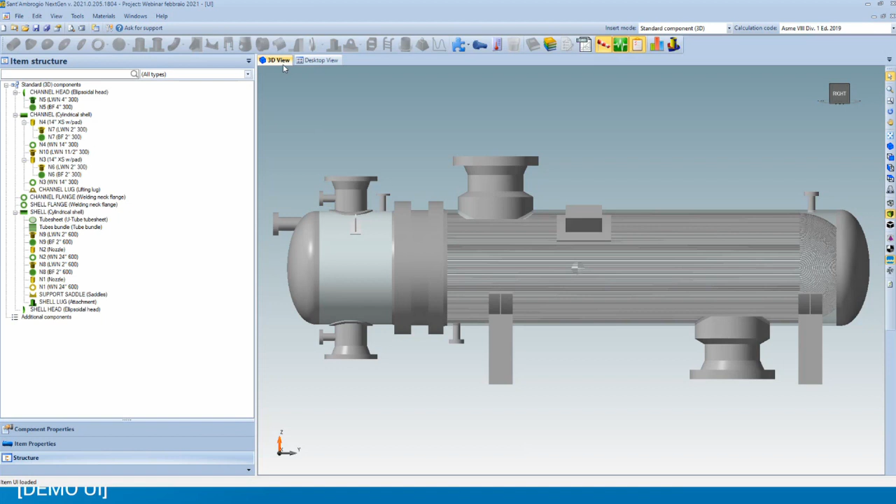I'd like to run the demo directly so I can show you what I'm talking about. This is a complete item - a heat exchanger, ASME Division 1. If I switch to the desktop view now, I have a more complete view of my components. The components I have in the 3D view I can see as icons, but we also added some columns.

These columns help you identify where you have issues, like if you have the wrong under tolerance or wrong corrosion considered, or if you want to check the joint efficiency. For instance, if you have a 0.85 joint efficiency in your components, you'd want to check if the joint efficiency for heads is set to 1, because it's one thing that can easily be forgotten.

Also, this list can be printed by clicking this button, and you can print it on paper and use it as a checklist to make a global check of your project.

If you have any suggestion for columns that we can add in this view, please share. The columns can be configured by selecting columns.

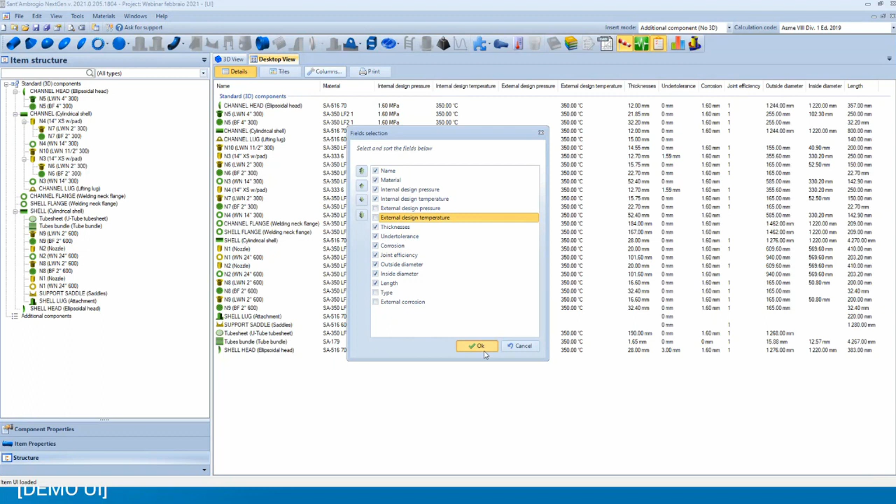Also, for example, if I don't have the external pressure, I can omit these columns, and this also affects the print of the same table.

So I think that this is a good way to use the desktop view, which is usually used to design components that are unbundled from the 3D view. But in this case, it's a helpful overview of your project. It can also be used to check if the materials are congruent.

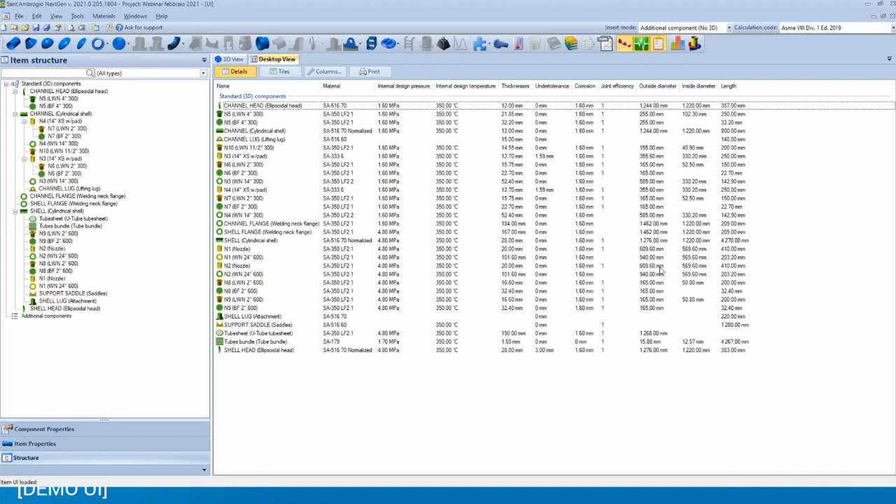And again, I was talking about the under tolerance, the new thickness under tolerance system. Previously, we were asking you to input an under tolerance in millimeters. That's the same thing that I have here in a cylindrical shell, so I was able to input the under tolerance, say 1 millimeter.

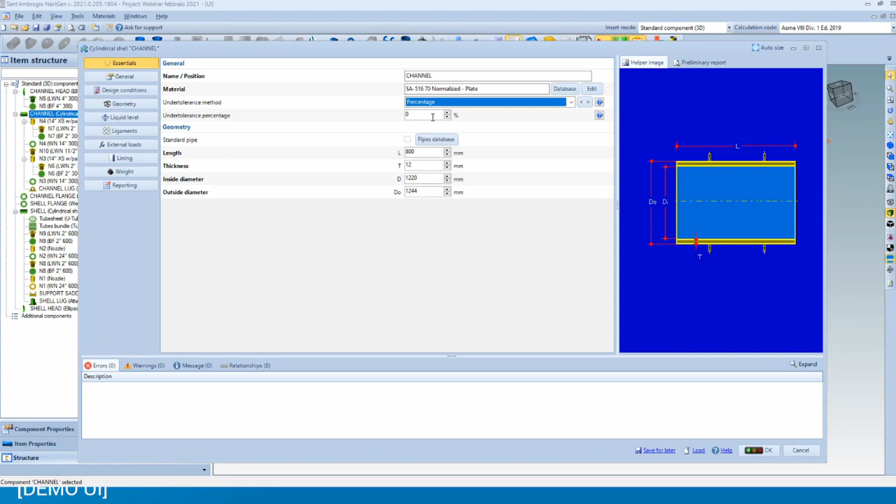Now we also have this list here that can be changed to select the under tolerance method. For example, if you want to input the percentage of under tolerance instead of the absolute value, you can do it. This is automatically set for nozzles.

For instance, I'm adding a nozzle now. I select a pipe from the database, let's say 2 inches. And you see here that the under tolerance method switched to percentage, and the under tolerance percentage is set here.

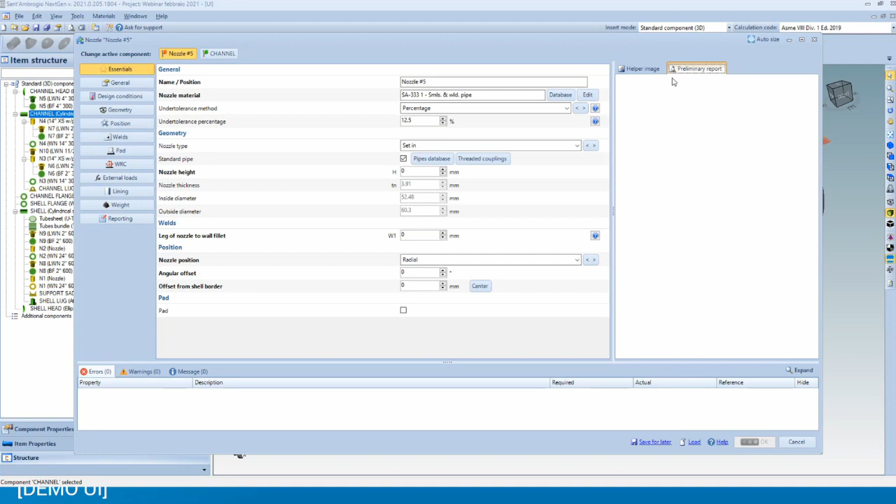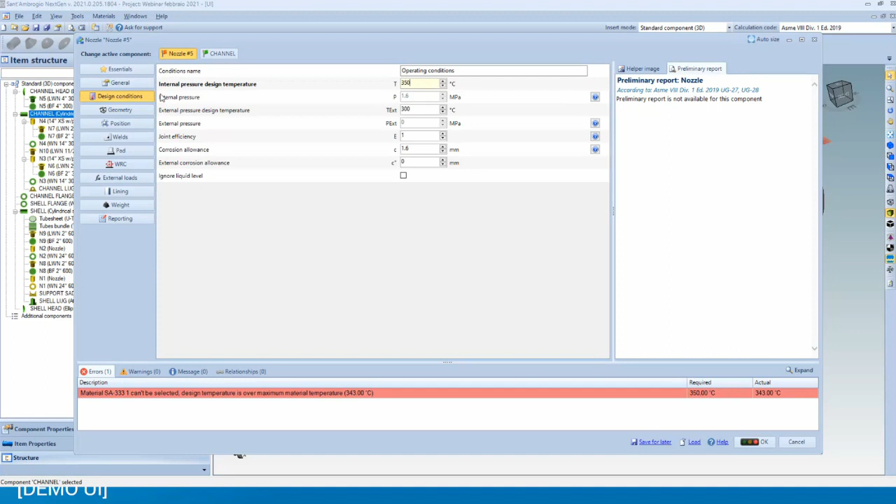And as soon as you have a calculation, let's set values. I'm changing the temperature here to make the calculation.

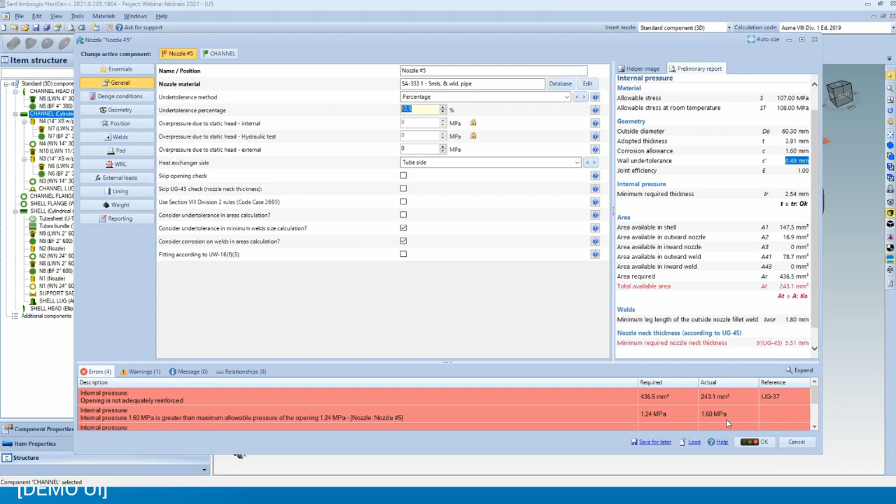As I was saying, as soon as you have the calculation done, the under tolerance, of course, in the calculation is still being used as an absolute value, but the software asks you for the percentage. This was previously done, but as soon as you changed the dimension of the pipe, you needed to remember to change the value, because it was only calculated the first time that you selected the pipe from the database. So now it's kept in sync.

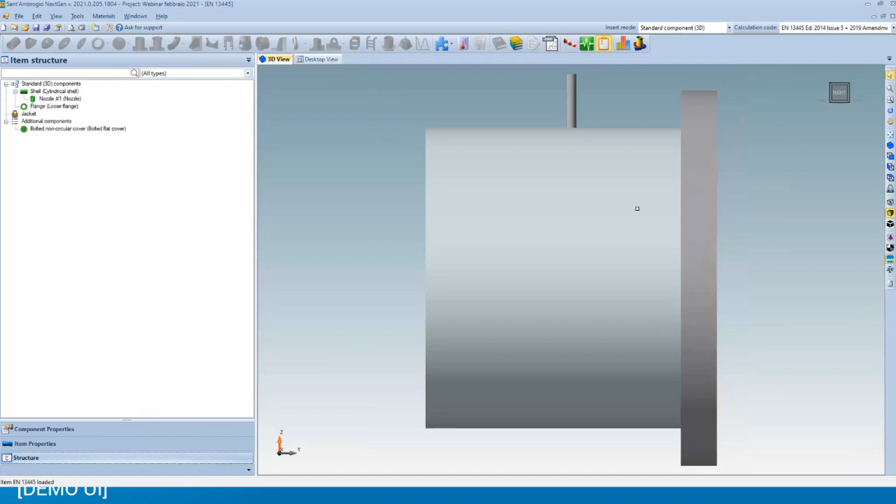This is more useful in an EN context, like this item, which is EN, because the EN context also shows you an extended list of under tolerance methods that are according to all these standards.

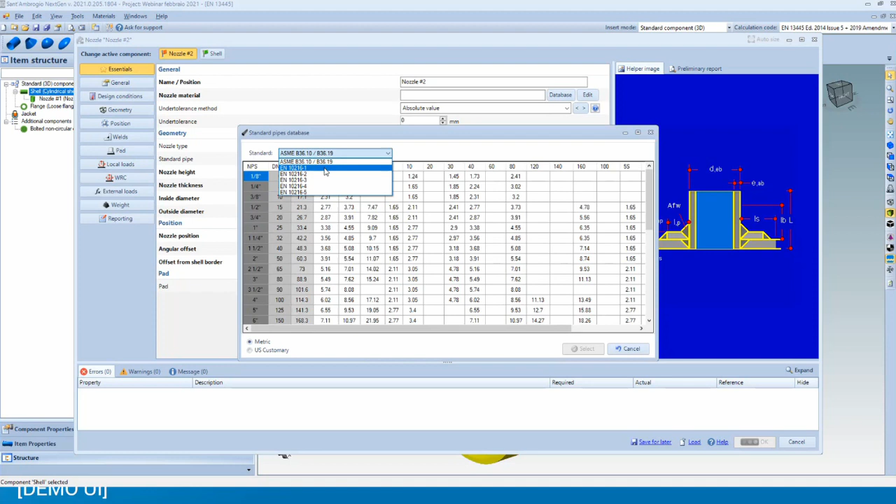And when you select a pipe from the database, you can select EN 10216, and we are planning to add also the 10217. When you select a pipe, it automatically switches to the appropriate norm.

You can also use plates according to EN 10029, and we are planning to extend this list to more standards. So you don't have to input, like previously, the absolute value and make a manual calculation of these under tolerances, because the software does that for you.

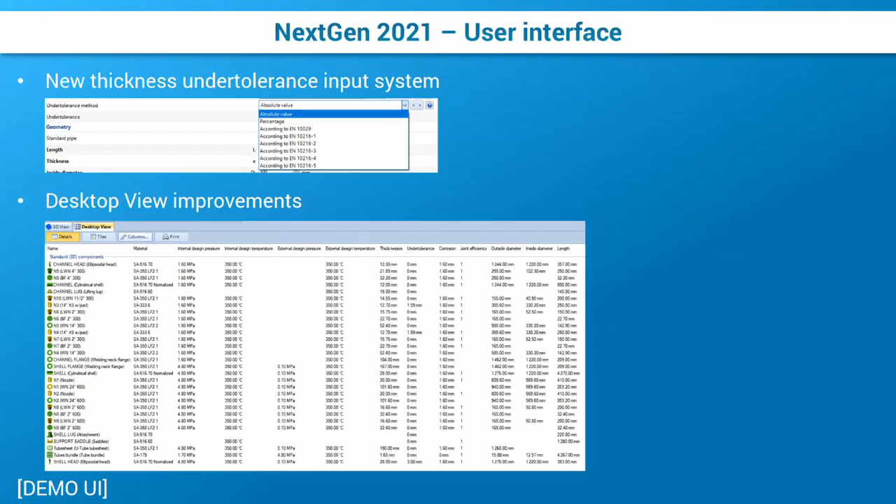Okay, our slides. Now, what's new in EN 13445? We're still waiting for the next edition of the norm to be published, and from what we know, it should come this year, so it's expected to be edition 2021.

We added the pneumatic test, which was previously missing, according to chapter 10.2.3.4. We added the calculation of non-circular flat bolted ends, and this goes along with some new additions we are still making to the software that will let you calculate non-circular bolted flanges along with the ends. And we added the optional validation of flanges, flange welds, according to table A7.

Let's see it in action. Okay, we have our EN model here. As I said, we added the pneumatic test, and under item properties, which can also be found here...

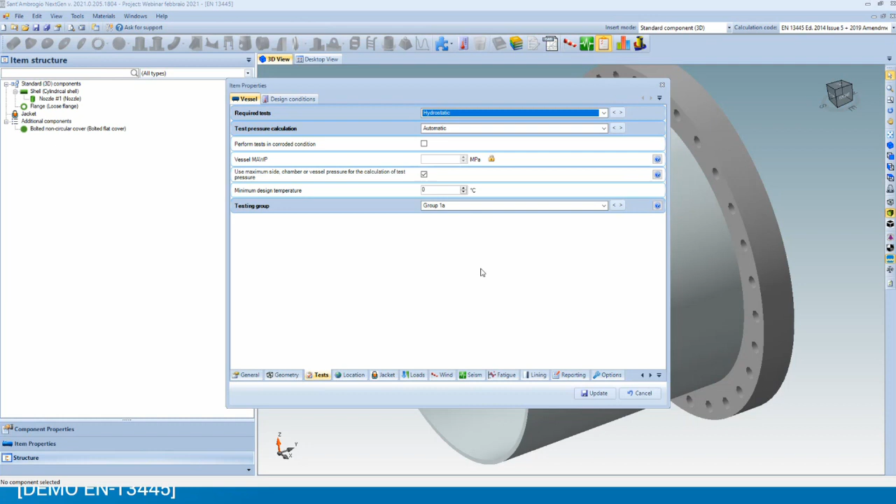Under test, we previously had only the hydrostatic option or none. Now we have pneumatic and the combination of hydrostatic and pneumatic. So you can enable that and make the test like that.

And as I said, we added the bolted non-circular covers. They can only be added as additional components for the time being, so you need to go in the desktop view and add from here a bolted flat cover.

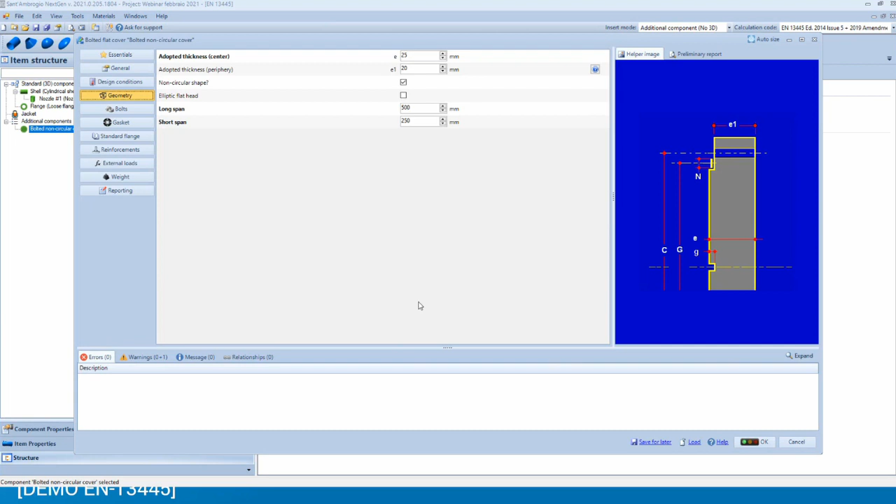As soon as you add it, you can now see, I think it's in geometry exactly, the non-circular shape checkbox. This was already available for welded covers. Now we added it for bolted covers too.

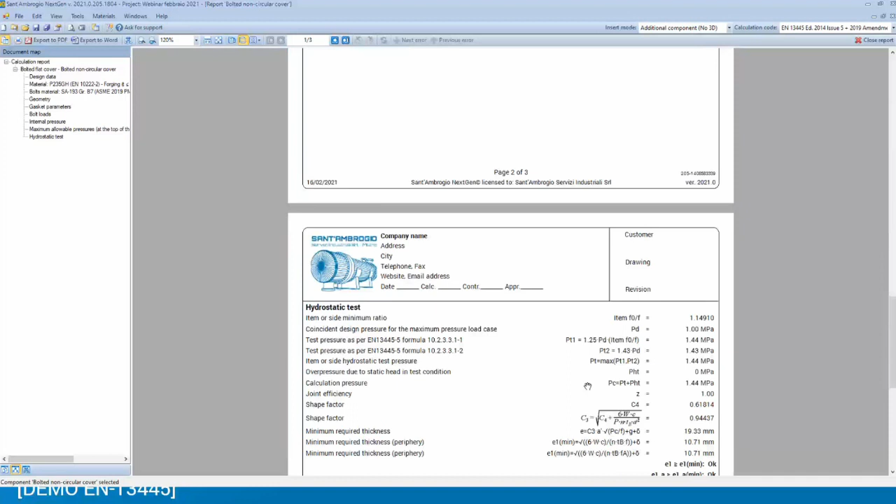And from the printout, we see the reference, and we also see that a portion of the calculation is made according to the PD norm, the English norm. We are working to add the rectangular flanges calculation too, that will couple with this, blind flanges, and again according to the PD norm.

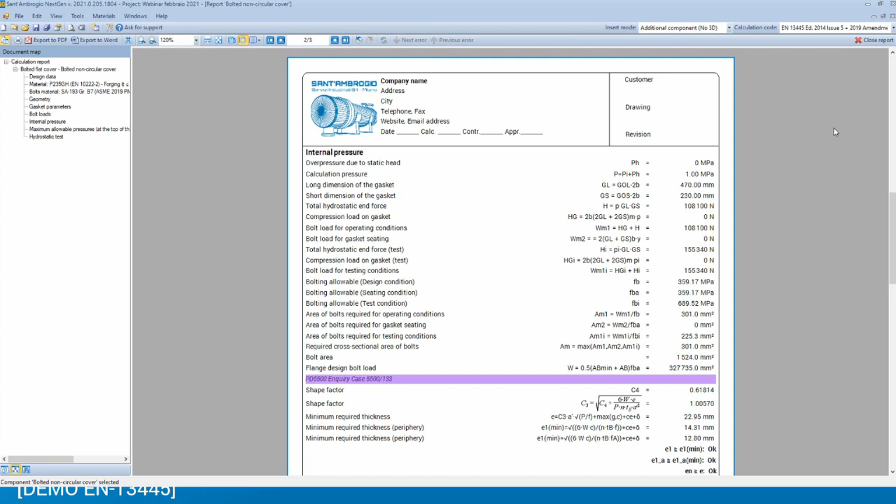And let's see what we also have for the EN. In the flanges calculation, we added an optional welds check.

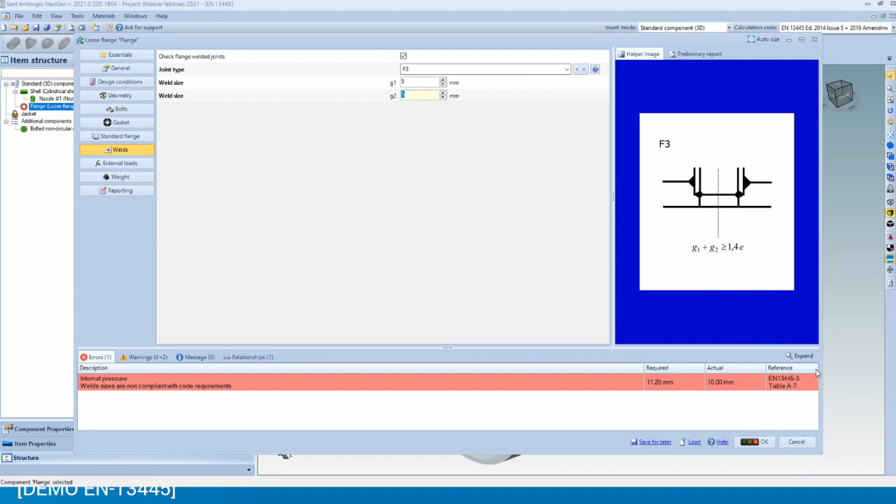So this is not mandatory, you normally see the check like this. If you enable that, you can select a joint type from the list. There are several types, and you can input the weld size, and the software makes the calculation to check if the requirements of table A7 are fulfilled.

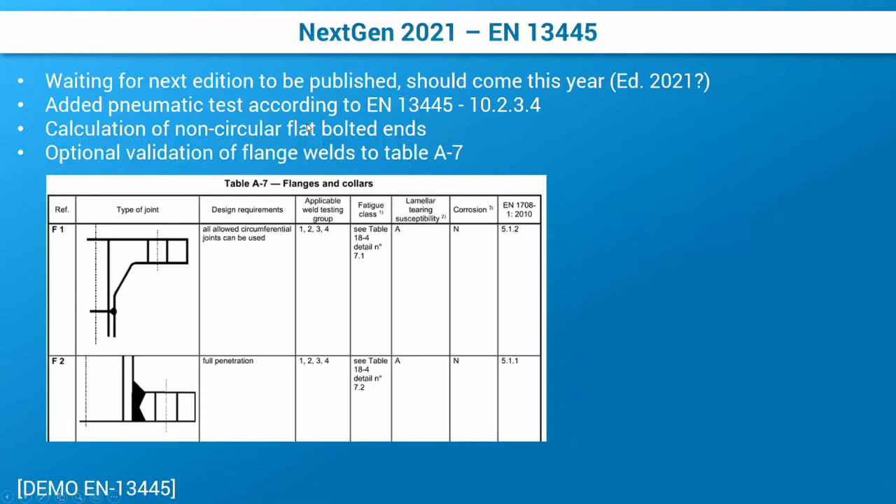Okay, let's move on to AD 2000, where we updated the calculation of the stiffener rings according to the January 2020 edition of the norm. We also updated the behavior of materials for low temperatures, again according to W10, which was updated last January.

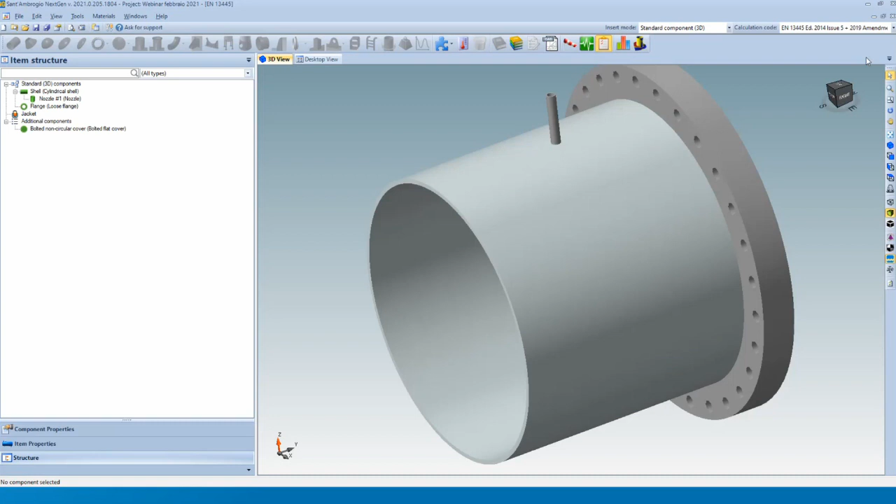Now, this is quite important. We added the ability to select the yield strength to base the allowable calculation for forged austenitic steels. Let's see where it is.

Okay, this is a flange made in AD 2000. Here, under General, you can now choose the yield strength for allowable stress calculation. This is automatic by default, but you can force the use of RP 0.2 or RP1. You can see the result of the calculation here.

Now let's use RP 0.2, and we have 37 millimeters. If we base it on RP1, we're down to 32.93 millimeters. So previously this assumption was made automatically by the software, but it's not always the best one. Since the norm allows it, you can now select it manually and see what's best for you.

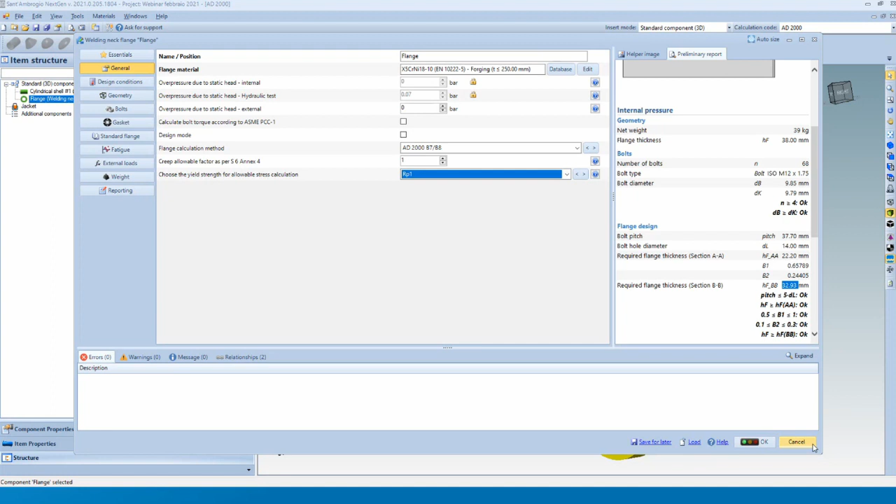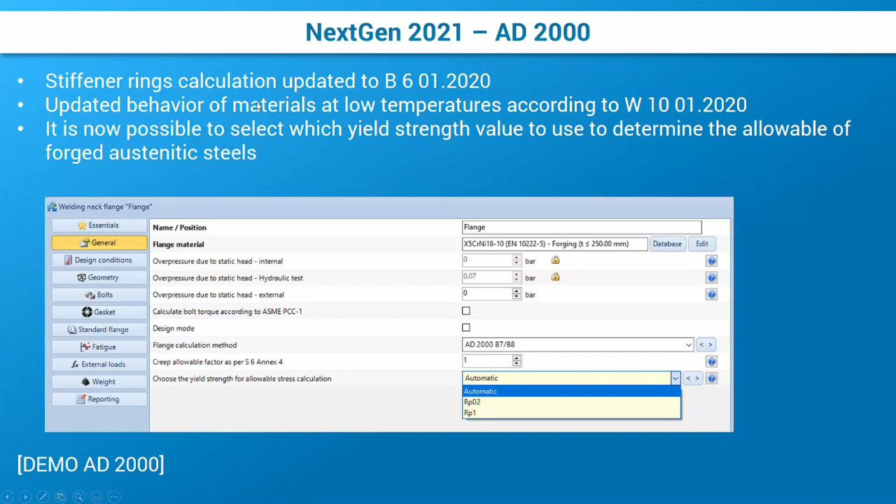The other two updates just reflect something in the norm that has been updated, and we received those updates. We have some new things in VSR, which is the Italian norm. I think that probably most of you don't use that, but I will run through them quickly.

And there's also one thing that I would like to show you, because it will become relevant in the near future. We added a calculation of sight glass, and this can be also extended to other codes if it may be interesting for you. If that's the case, please let us know.

And we added the pneumatic test also here, like in the EN. And since from time to time the allowable stress, the stress ratio used by the norm can be the highest instead of the lowest, we highlighted this assumption whenever it works.

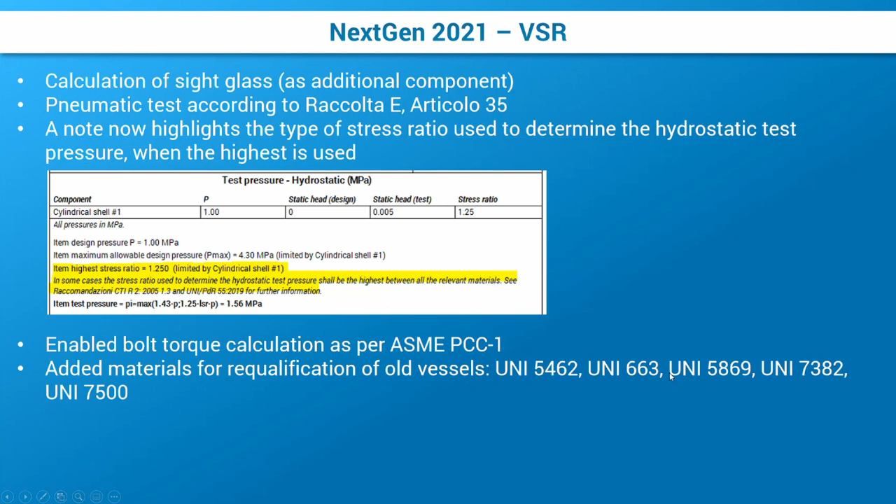And we enable the torque calculation as usual according to ASME PCC1, and we added some materials for requalification of old vessels from these Italian norms. I won't show you the demo for this one, but there's one thing that I would like to show.

And that is the equations in the calculation report that can now be printed in numeric format. I would like to show you. I think I closed NextGen. Let's see it in action.

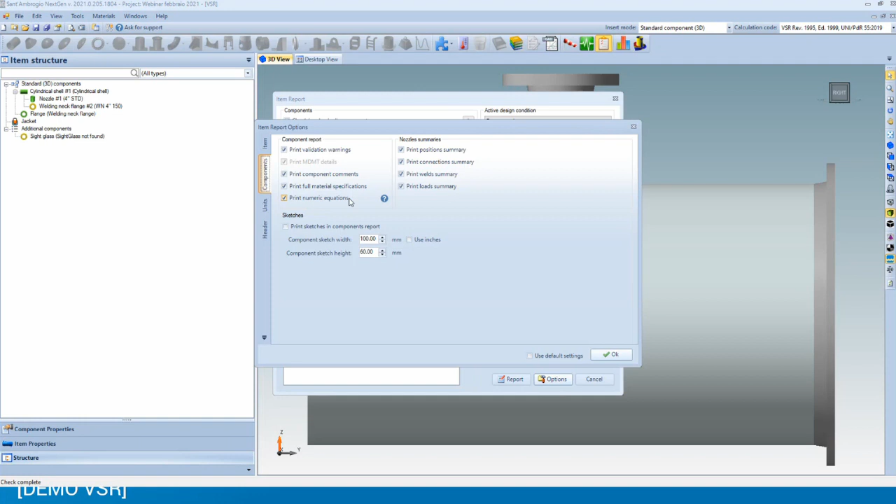We are already working on the European EN 13445 version of this new feature. Every time you print the calculation report, now you have this option here, print numeric equations, with a little help explaining what it means. Click OK.

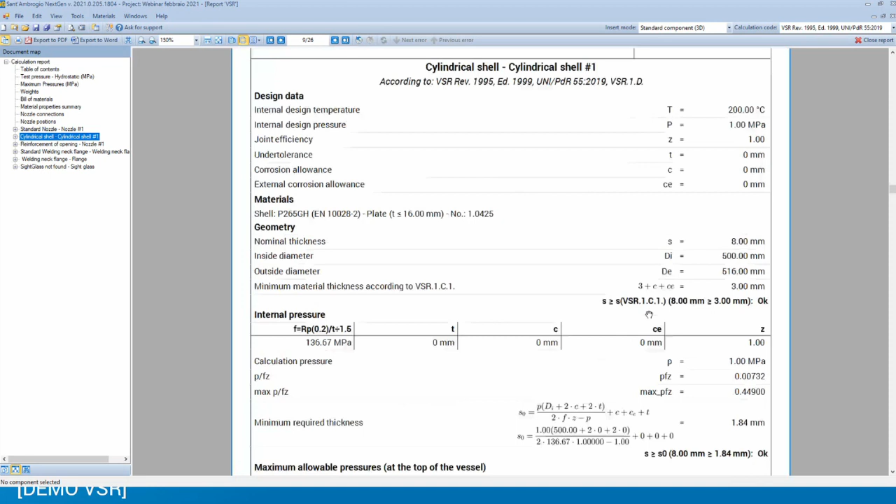Okay, the calculation report in this case is a little bit different. You have these lines, otherwise you won't be able to tell one line from another, because we have these double-decker equations now, and we are planning to let the user also select a combination of configuration if you want only the numeric, or only the symbolic equations.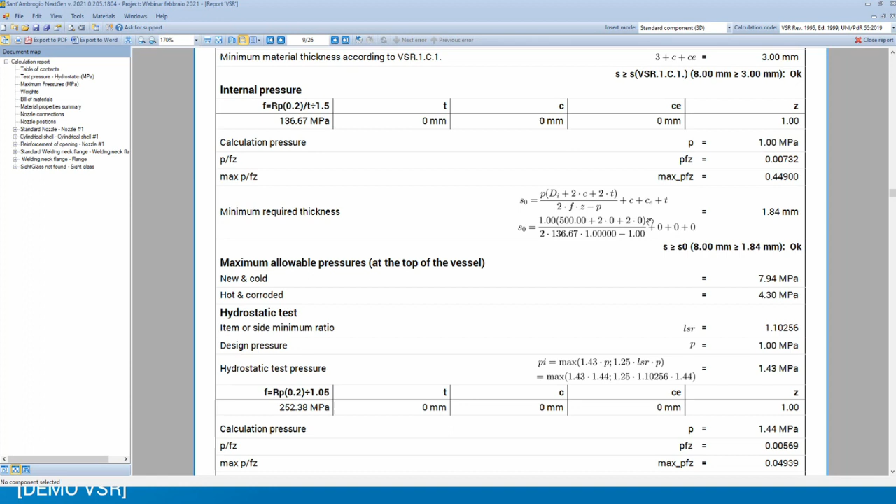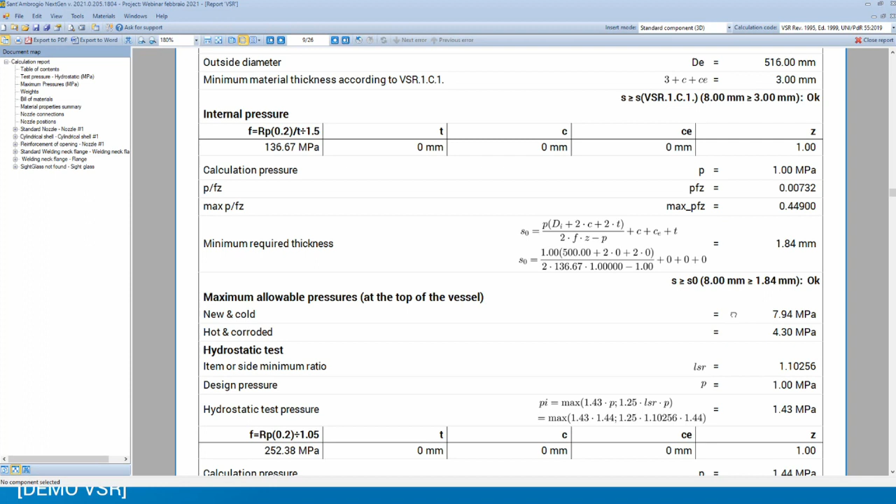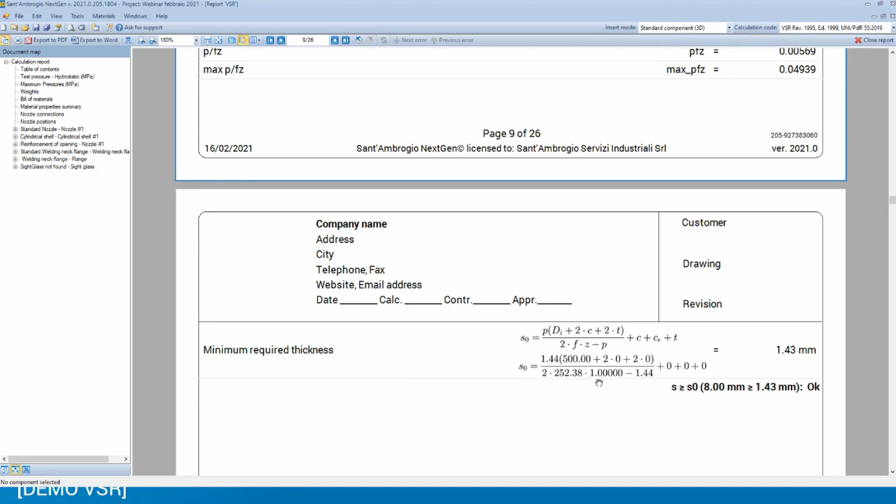But this is quite an interesting feature also because some customers coming from different software are used to having the values of their equations displayed in the calculation report. So it is now possible to do this, and also, of course, check the calculation more easily instead of going through the values that you have above and seeing what the value of each symbol is at the moment.

Again, this is a feature that is available for the moment only in the Italian code, but it will be extended soon to other calculation codes.

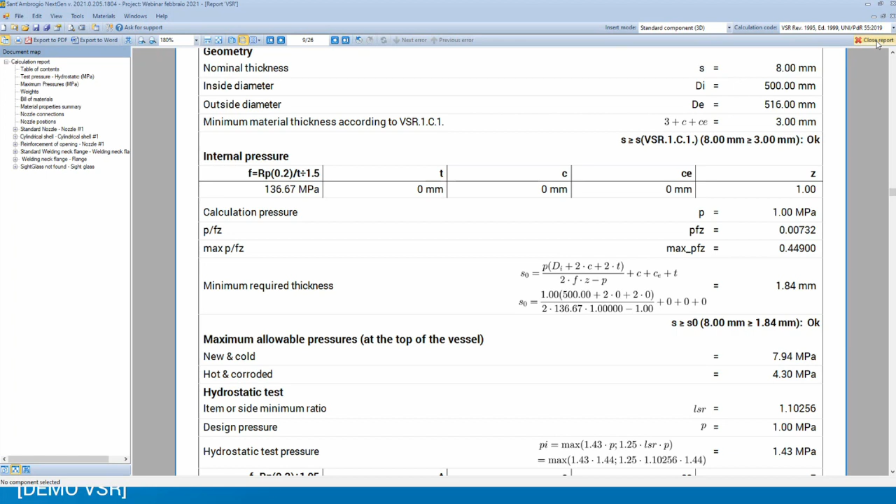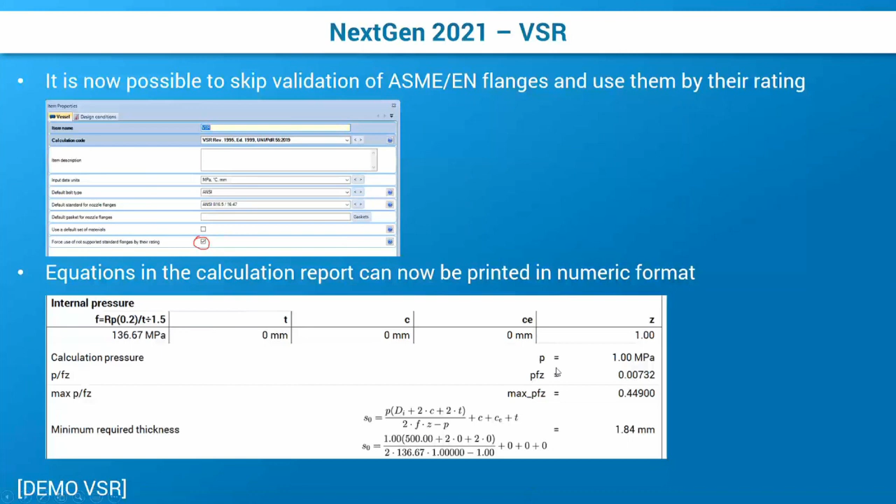Okay, I think it's here. We have an update for the PED that involves all the European codes. There is a note in the PED guidelines G06 and G08 that says that from time to time the bolt material should be considered when determining the lowest stress ratio. Particularly, a bolt is not considered to be a main pressure-bearing part unless its failure will result in a sudden discharge of pressure energy.

So if you fall into one of these cases, where your bolts are needed to keep the pressure inside your vessel, because otherwise they would result in a sudden discharge, then in your flanges you can now include the bolt material in the determination of the minimum stress ratio for the test pressure. This is optional, you have to opt in for this behavior, but keep in mind that the PED states this note in these guidelines, and if you want to apply this behavior, you need to check this option inside your flanges and let your bolting material be included in the determination of the lowest stress ratio.

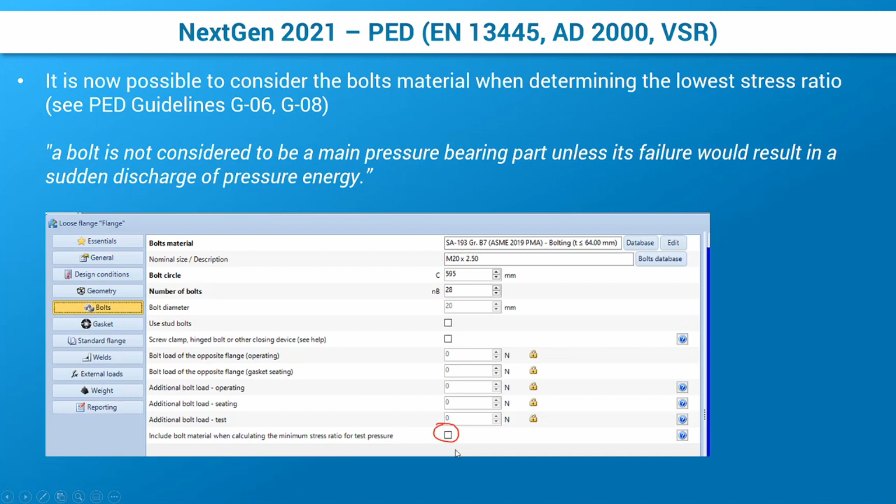Okay, let's move on to ASME Division 1. We are test driving this new feature for a single calculation code, because we want to receive feedback about this specific feature, and then we will expand to other codes like the EN code, for instance. So we added support for cladding and weld overlay inside the calculation of vessels, and let's see it in action.

So this is Division 1. If you go to see your item properties, you have a new category here, which is lining. We moved the insulation inside the lining as well. It was previously in a standalone category, but we moved it here because it's more appropriate.

And we have now this option to include the cladding and weld overlay, to define for the whole vessel the cladding and the weld overlay. First thing to consider is that the cladding can contribute to the base metal resistance. That is the whole point of this addition, to be able to consider the cladding material as resistant to the pressure, because otherwise we can do like we did before and consider this lining material as corrosion. But the good thing is that part of this material can withstand the pressure, and so we need to consider it. This is optional. You can opt out from this option.

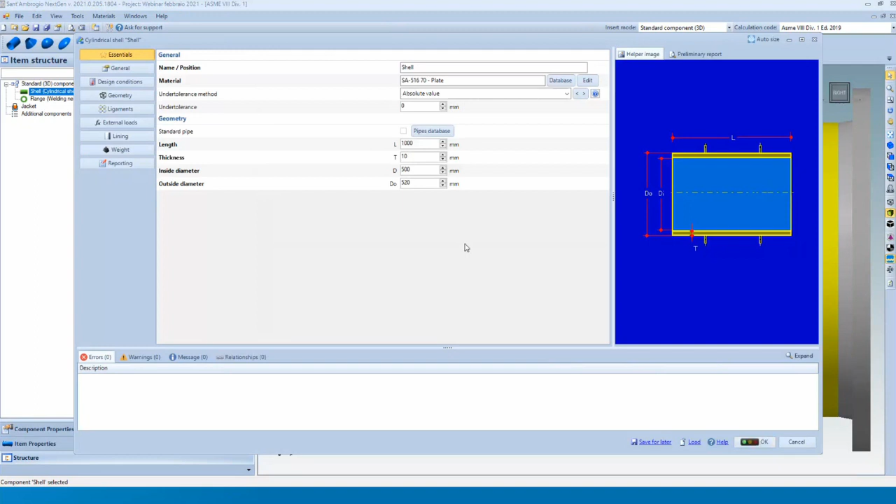Okay, we have a cylindrical shell here, and the lining category has been added here, and we can select the lining type if we want cladding or weld overlay. The software tries to infer which is the best one for your pressure part, but you can always change it. The lining thickness uses the default value that has been defined for the whole vessel, but you can change it here.

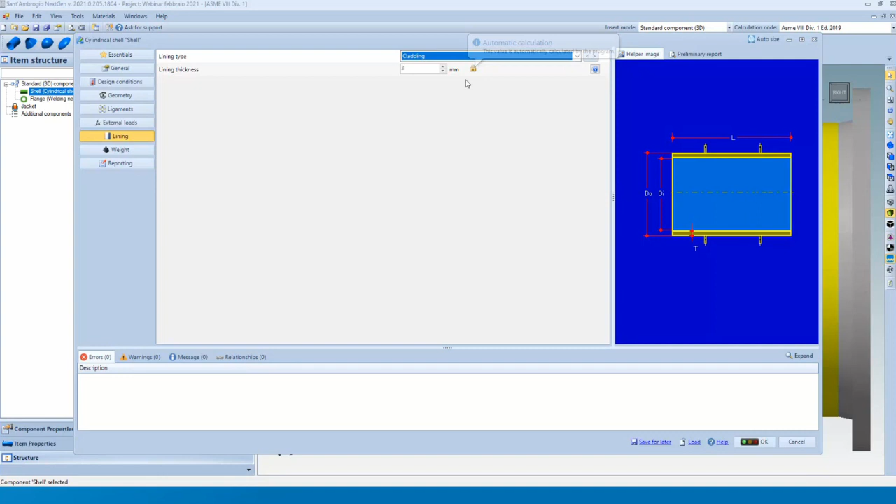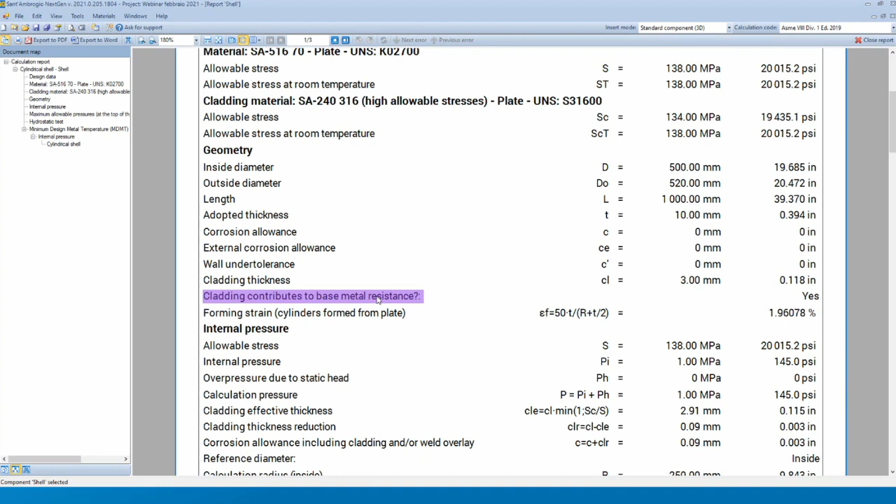And let's see in the calculation report how it goes. Of course, we have a recap of our input values here. We are saying that the cladding contributes to the base metal resistance, and for this we have the determination of the cladding effective thickness, which is a function of the stress ratio between the base metal and the cladding metal. So we determine a thickness reduction, which is the portion of the cladding that is unable to withstand the pressure, and we add it to the corrosion allowance. So we sum the corrosion allowance with the portion of the cladding thickness that is not effective. Then all the formulas stay the same because C has been redefined to include the cladding thickness.

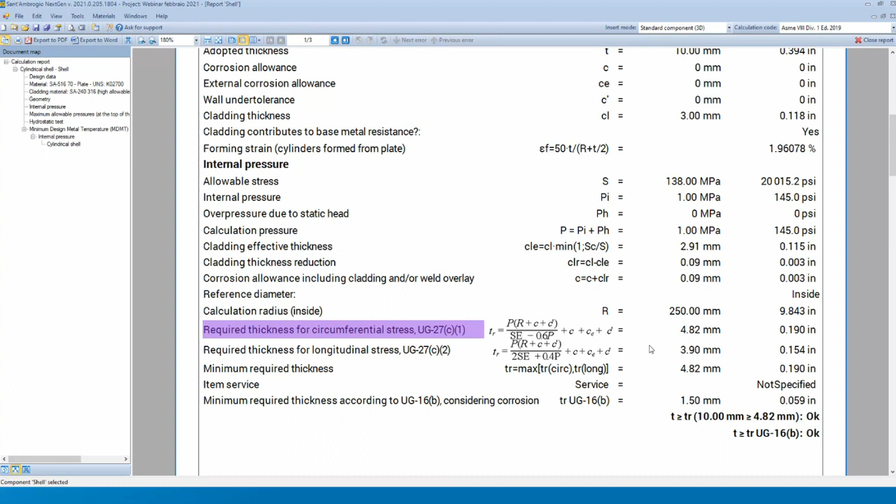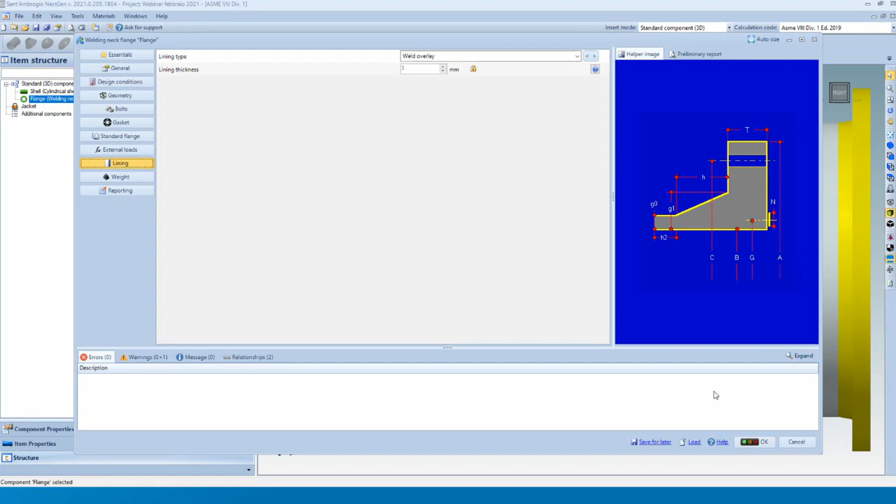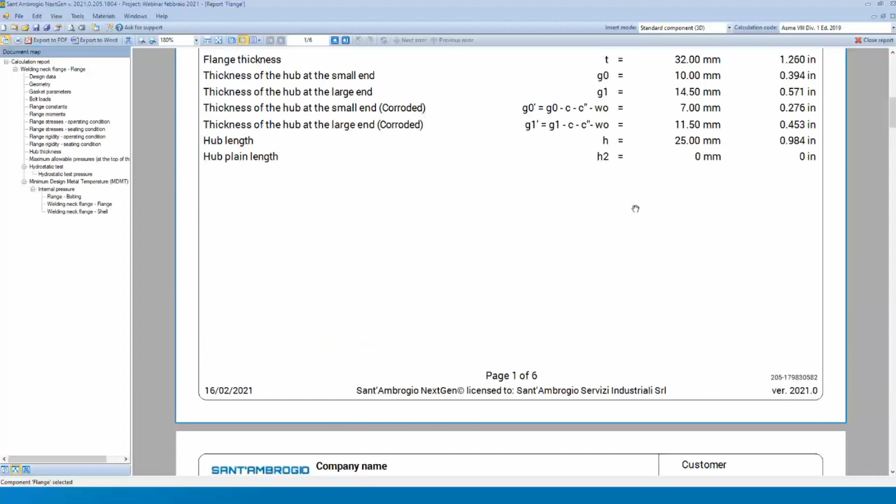This only works for cladding because we can't select a welding material, as we don't have the mechanical characteristics of the welding material. In the case of flanges, for instance, the lining type can be set to weld overlay, and the lining thickness is again the one that we selected globally for the item. But in this case, we don't have a calculation of an effective thickness, because all the thickness we are adding as weld overlay is ineffective and is being removed as wall corrosion. But it's interesting to have it separate in your calculation report.

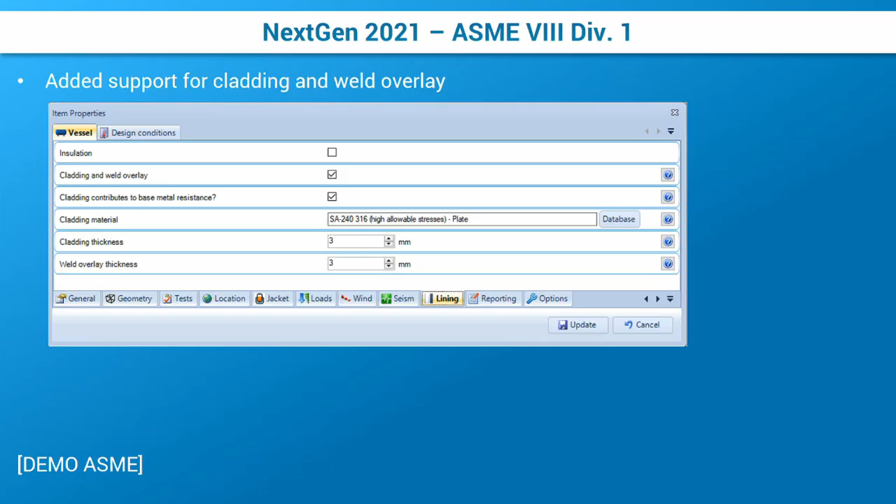So this is the second feature I've shown you that has been added for a single calculation code, but again, we are planning to extend it to more calculation codes. We are gathering feedback on this feature specifically. For instance, we had feedback from a customer asking to consider or not consider this cladding and weld overlay material weight in the calculation of the load combination for the structural support. We are working to also consider those materials in the weights of the vessel.

Let's dive into the WRC and supports changes. We added an option to keep the WRC loads on a support in sync with the support calculation. This was added because previously there was a button to read the loads from a support, but if you made changes to the whole structure, like adding or removing weight, the loads for the WRC on the support stayed in a previous state. Now it is possible to check and keep those loads in sync.

We can now again add legs made of pipes from B36. We can now select to use the column structural analysis to calculate legs and skirts. I'll show you how. The foundation bolts calculation temperature can now be set within a load combination and changed from 20 degrees to whatever you need.

This is a very small change, but it was annoying: the forces and moments shown in the WRC loads in the component window were different from those shown on the calculation report in terms of directions, so we made that congruent. And now the WRC loads can be used on flanges as external loads, so consider them on flanges. Let's see them in action.

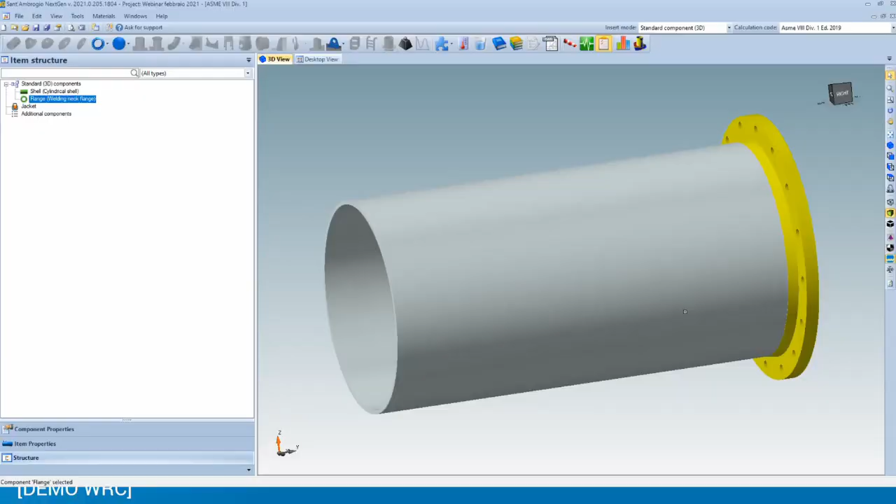The first thing I told you was that we added in WRC a checkbox: keep WRC in sync with support loads. It can be set, and you see we have this set of loads here. Previously, you could read components load to fill these values.

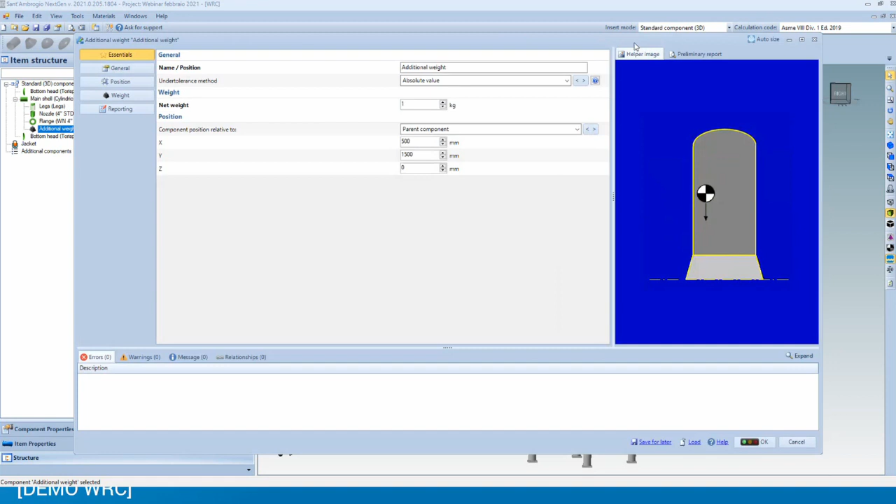Now I have put a weight here, and I want to increase that weight. If I go back to the legs, of course it can't withstand the load, but also the loads here on the attachment to the shell have been updated automatically. So this is quite handy.

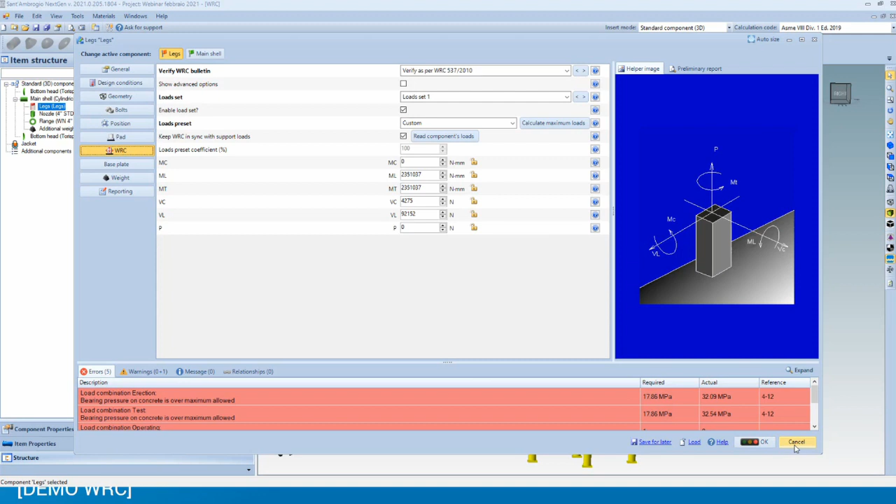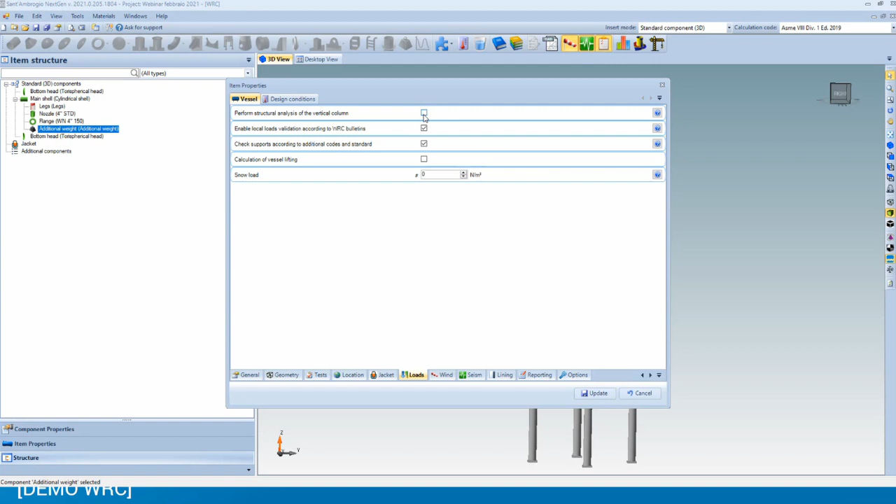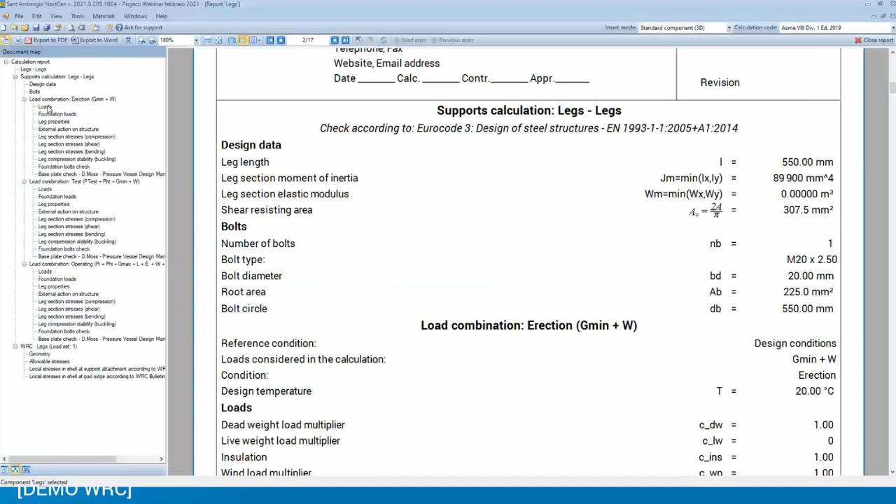Then here in the item properties under loads, for our customers that have the calculation of the structural analysis as part of their license, they can now use the result of the structural analysis for skirts and legs calculation. What does it mean? It means that if you don't have this option, because maybe you don't have the structural analysis of the column, if you made a calculation of the legs, for each load combination you have a determination of the loads acting on the leg and the foundation loads.

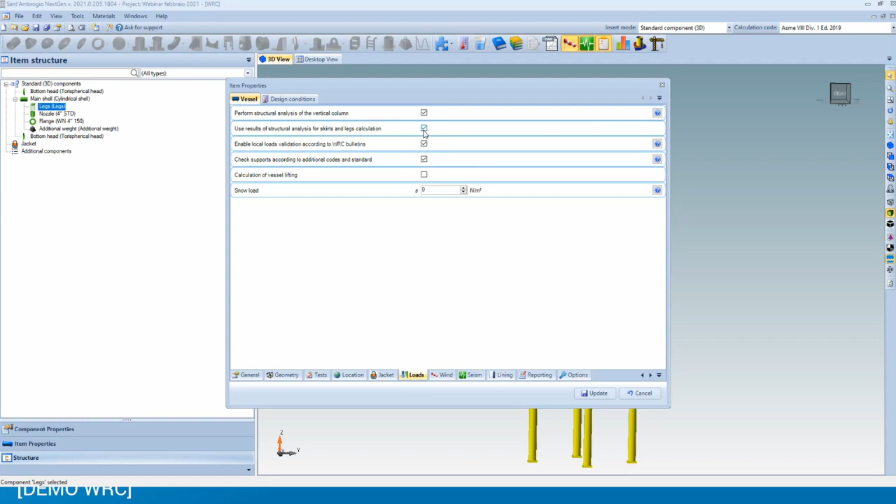If you have the structural analysis as part of your license, you can use those results to calculate your legs. This also works for skirts.

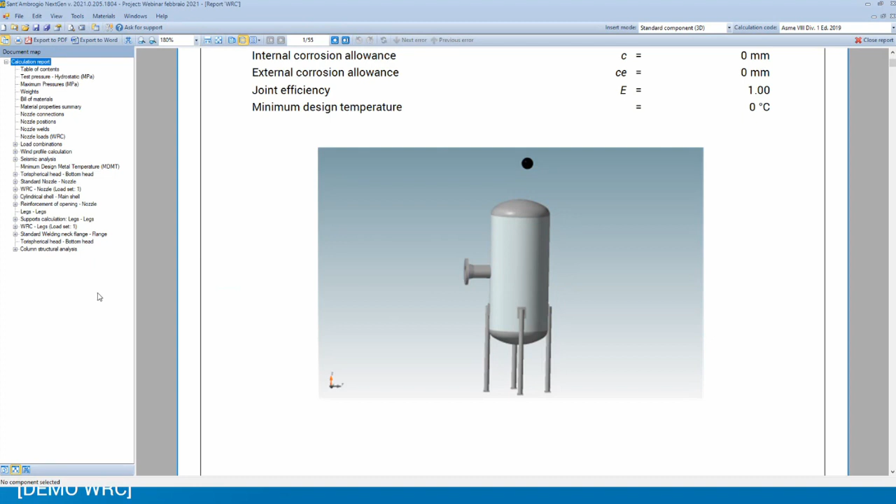And if we make the whole calculation of our vertical vessel - of course this is a very short vessel, so you don't have any big difference, but for large columns it can make a difference - here we have the column structural analysis. So we start from the top and go down to the bottom and see all the loads acting on each part of our column, and the results of this analysis are now fed into the legs calculation.

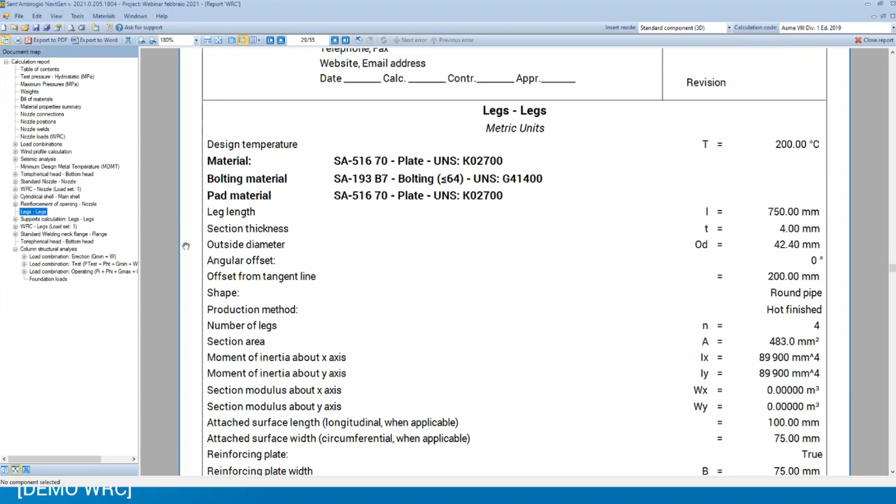We don't have the loads calculation anymore in our legs calculation, we just use the values determined by the structural analysis. This also helps if you had previously noticed that the structural analysis gave you some results and the legs calculation gave you a slightly different result. This happens because the structural analysis considers the vessel as a whole, so it's more precise in a way.

Otherwise, the legs calculation or the skirts calculation alone consider only the global weight localized on the center of gravity of your vessel.

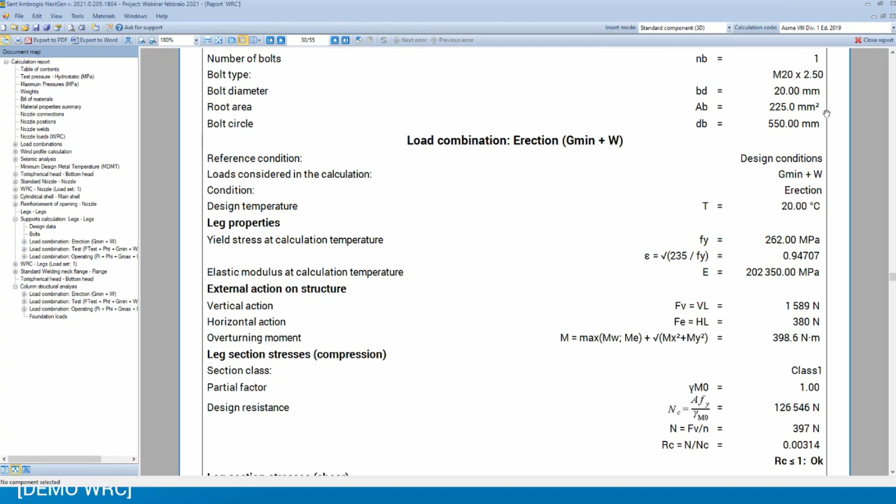Okay, let's see what we had. Also, foundation bolts calculation temperature - yes, you can set it from the load combination. So you can go into any of your load combinations, click edit, and now you can set the calculation temperature for the anchor bolts.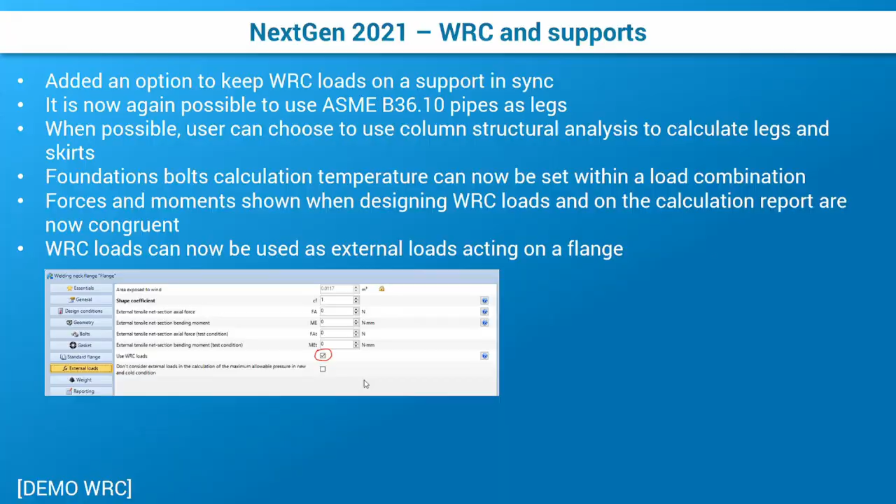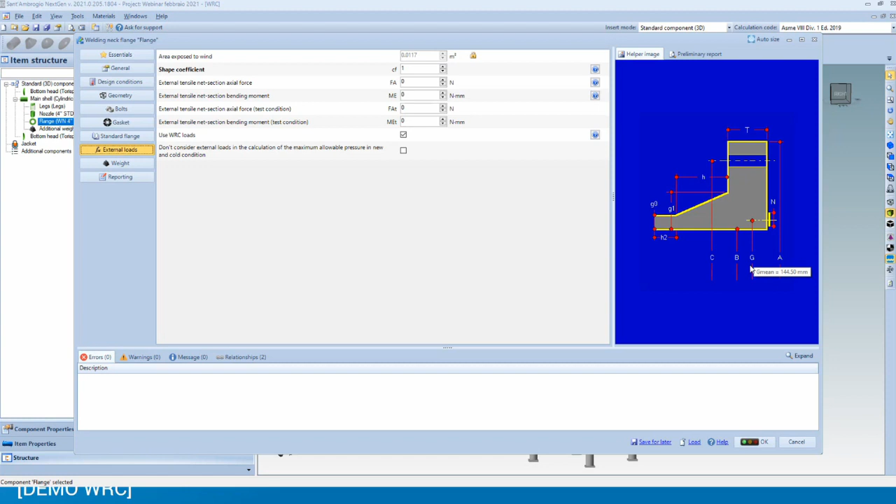Finally, in flanges, this is a nozzle where I defined WRC loads - here you can see them. And now in the flange calculation, if I want to, I can use WRC loads as external loads for my flange in external loads. So I have an equivalent pressure considered in the calculation of the flange, which is based on the WRC loads.

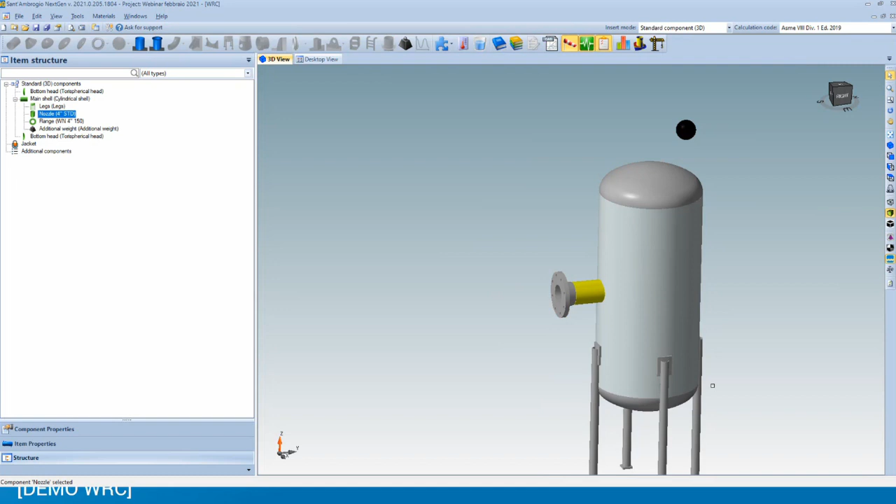We are also working on visual clues to show you where a flange or nozzle has external forces applied. This will probably be available in the upcoming version of NextGen, 2021.1, and you should see visual clues around your nozzles where you have defined WRC.

Okay, we have some misc news, let's see.

We improved the calculation of some components' weights - this is a typo here - so the weight of some components has been improved in terms of precision.

We included the reinforcement pads for legs. We fine-tuned the calculation of flanges, specifically reverse flanges, that was a little bit off. We also included an estimation of bolts and nuts weight, and I'll show you how to include that, because by default it's not included in the calculation of the weight of the flange. Now under tolerance can be set on tube sheet flanges, long welding neck, floating and blind flanges.

The material is now split between the heat exchanger sides, because those sides have different temperatures quite often, and so the characteristics calculated are now split between those two sides.

The 3D models can be exported in BREP format, and again I'll show you how to do that. We added the calculation of reinforced expansion joints according to ASME.

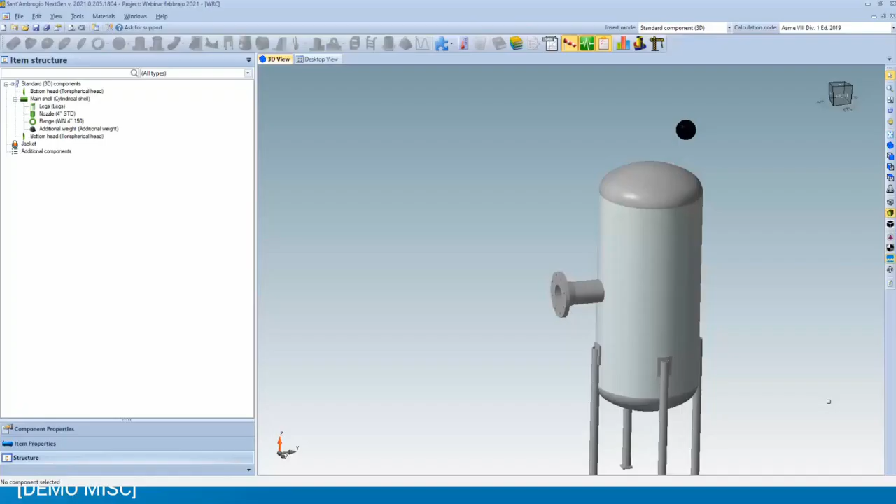This feature can be helpful in some contexts for those customers that are making the channel of the heat exchanger from only one component. So we added the ability to add, in a BEU for instance heat exchanger, you can select the bonnet as a flat bolted cover - sorry - and so you can model this type of heat exchanger by adding only the cover, which is bolted to the tube sheet, and then add the nozzles. Let's see an example of that.

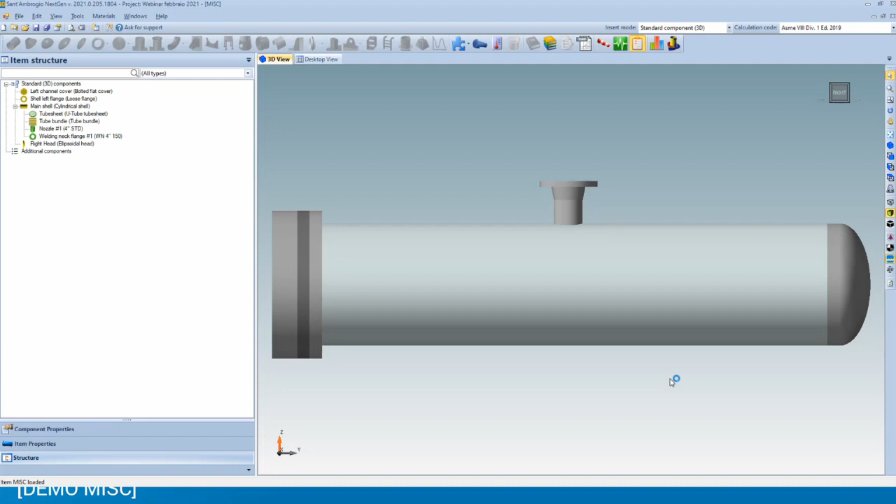Here it is, this is what I was talking about. In your bonnet type, now you have a bolted flat cover, which creates this type of heat exchanger. For this type of cover, the thickness can have a peripheral thickness larger than the center thickness. If you have this scenario, input the center thickness as the thinner part of your cover, and the peripheral thickness as the thickness of the bolted section. Now you're good to go.

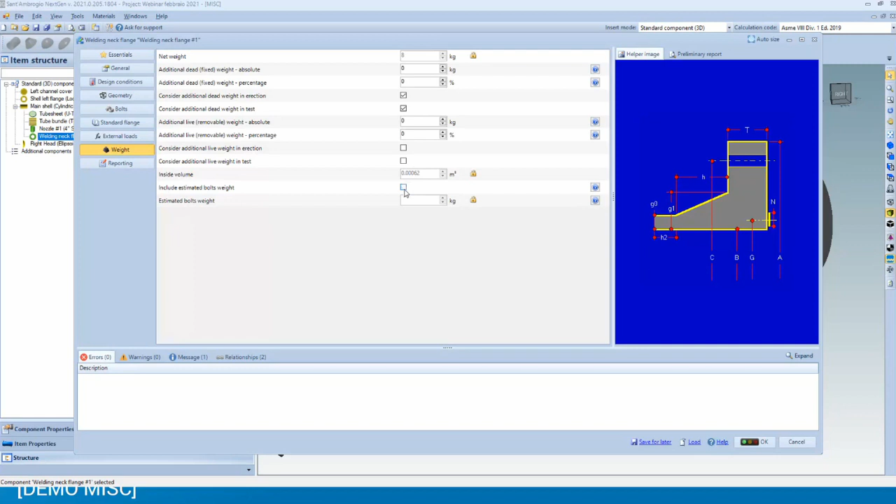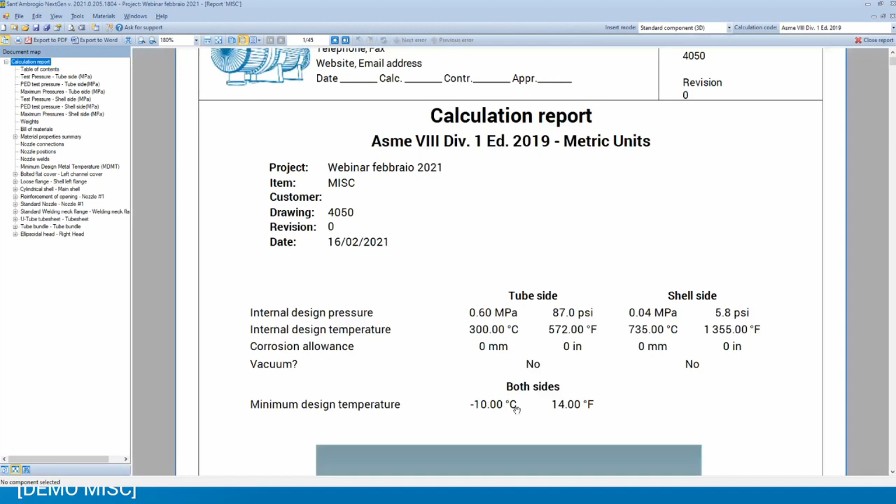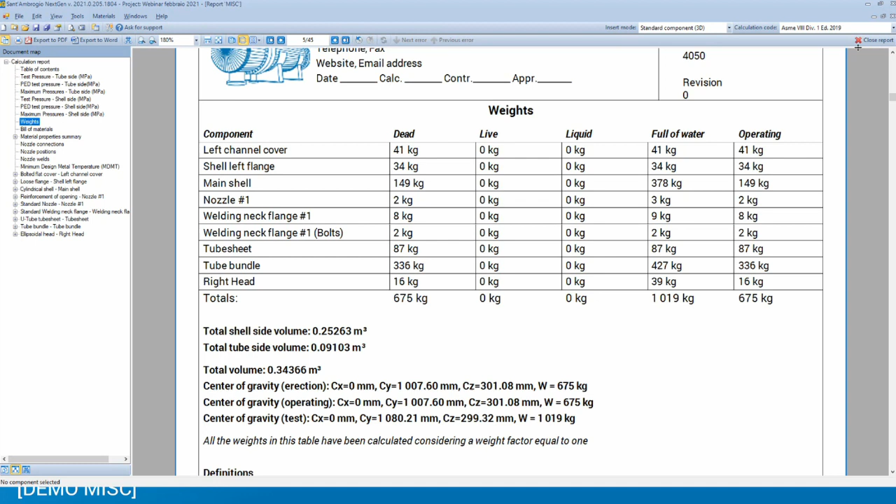Also, we had the weights. Let's have a flange here. Under weights, you can include an estimation of the bolt weight. It is considered as the global weight of the bolts, and you find it under weights, split between the welding neck flange and the welding neck flange bolts. This is an estimation because we don't have all the values needed to make an accurate calculation, but I think it's a good estimation of the real weight of the bolts and nuts.

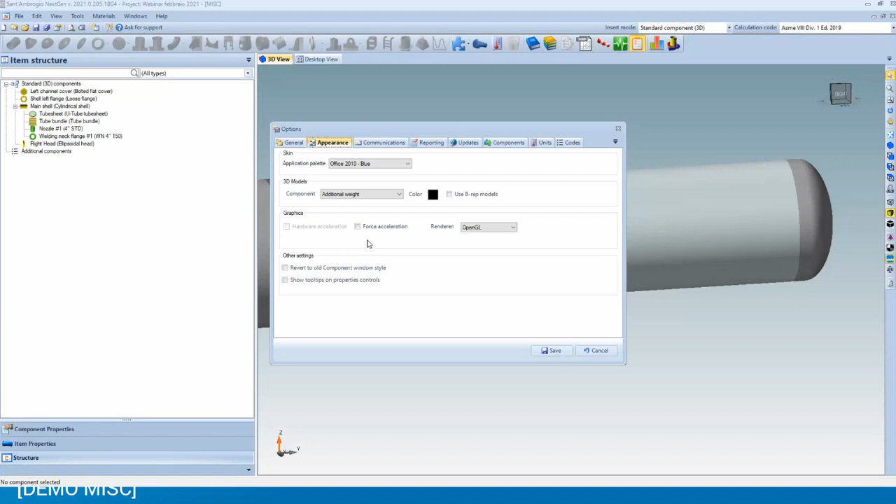The export of models in BREP format is a global option that can be set under Tools and Options, Appearance - you can use BREP models here. So when you export a model for a 3D application, the format of the 3D models is BREP.

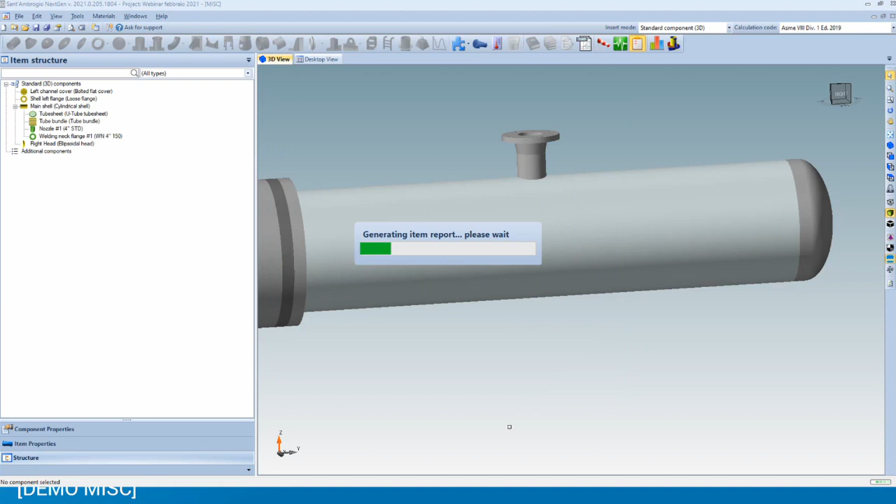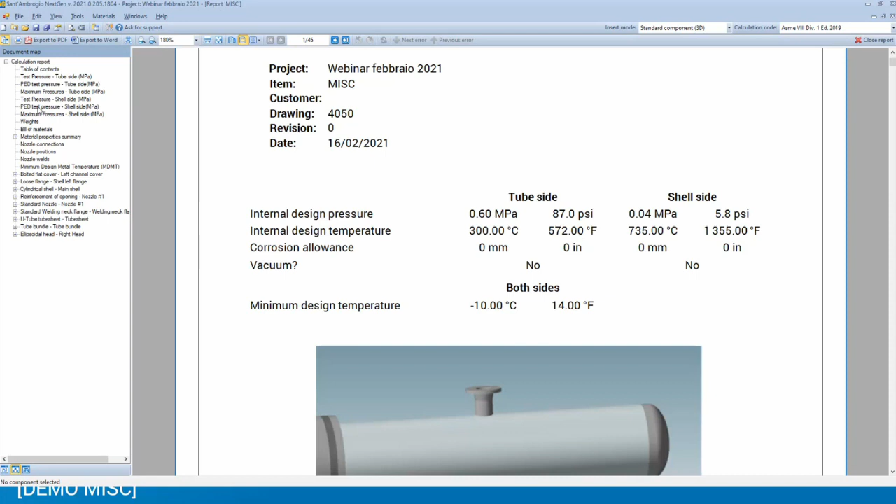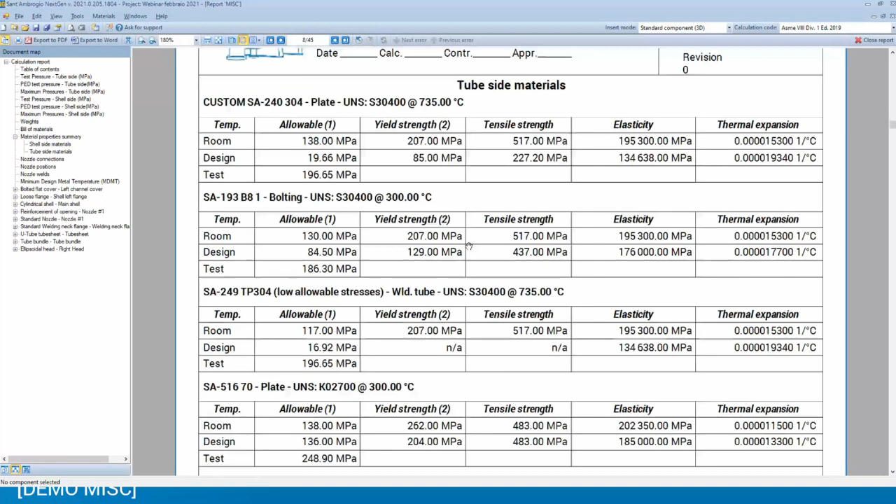We have expansion joint according to ASME. And finally, when you print a heat exchanger calculation report, in materials, the materials properties summary is now split between the shell side and the tube side materials, each one with its own calculation temperature.

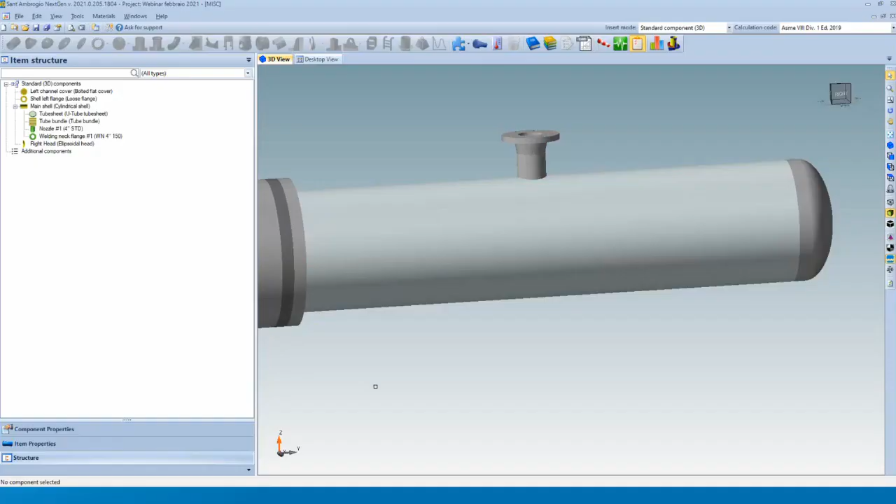That's a wrap for the selection of what has been added to the software. Of course, there is a long list of new features, enhancements, and bug fixes that can be found on our website, or you can reach it from here, history of changes. You go to our website and there it is, the whole change log for this version.

Let's see what we are working on. As I previously said, some of the new features have been added only on specific codes, but we want to extend them to others. So expect to see the numeric equations also in EN.

We are still working on the cladding and weld overlay support in terms of ASME Division 1. Once we are satisfied about the implementation in ASME Division 1, I think we will extend starting from EN 13445.

We are working on improvements on the 3D model export, because this is something that is quite often asked by our customers. So we are working on that. And if you have feedback in this area, please share with us, because we need to understand how this export works in different scenarios, different softwares for 3D modeling.